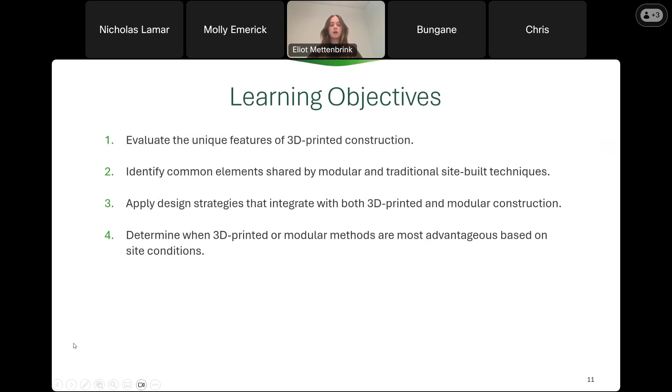Today, we'll discuss trends in novel construction techniques in the form of 3D printing and modular construction. Speakers will share real-world successes and challenges they have encountered while implementing these game-changing methods.

Our first speaker is Chris Krager with KRDB and Module. In 2001, Krager founded KRDB, a vertically integrated design, development, and build firm with a mission to create modern, financially accessible architecture that supports sustainable urban growth. Krager is also the founder of Module, launched in 2008 to expand the reach of sustainable modern design through factory-built housing. Beyond practice, Krager has served as a lecturer at the University of Texas at Austin School of Architecture and has presented at conferences and institutions nationwide, including Hive, AIA, and the Rural Studio. He also co-founded the DBA, Design and Build Alliance, a nonprofit that connects architecture students with real-world experience developing affordable housing for underserved communities. I will turn it over to Chris now.

Okay, thanks, Eliot. Appreciate it.

So today I'm going to give an overview of modular, or what I'm going to refer to as industrialized construction, and I'm going to give a quick synopsis of what I'm going to review today. We're going to start with a little 101 because I'm assuming some of the folks watching this may not have deep knowledge, so the first couple of slides might be a bit redundant for those of you who are familiar with the modular world. We'll review what it is and how it's defined, the different types of industrialized construction, some myths about it, benefits, and then a quick tour of the evolution of our firm through the modular space. It's a lot of material, so I'm going to move through it quickly. Please type any questions in the chat for the Q&A.

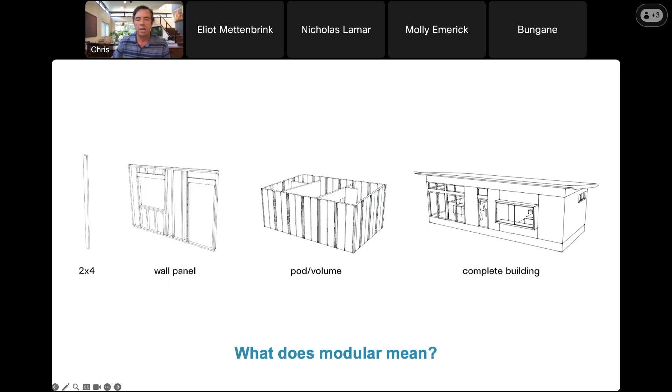So the word modular means something that's designed with a standardized unit or dimension for easy assembly, repair, and flexible arrangement. The term could apply to something like a 2x4, a wall panel, a pod, or a volume, but it's often used interchangeably for the thing we see here on the right, which is a full volumetric building. There's an umbrella term, industrialized housing, and under that umbrella there are three different types of industrialized housing.

So there's modular construction, which is what our firm designs and builds, and that's a factory-built dwelling built to IRC or IBC that's placed on a permanent foundation. And then there's manufactured housing, which is a factory-built product delivered on a steel chassis, transported in one or more sections, not put on a permanent foundation, and built to HUD code.

And then finally, there's park models, which are towable, recreational type vehicles like an Airstream trailer. And that has its own code, which is the ANSI A119.5.

So some of the myths about modular construction: one is that it's less expensive than site-built construction, and this is not true. Essentially, it's at parity these days with site-built construction. Another is that there's no design flexibility with modular construction because of the constraints of what you have in the factory and what you can deliver, and this just isn't true. A seasoned modular designer can achieve just as much as a typical site-built building.

That it's poor quality, also not true. These are built in a controlled environment under a stringent QA, QC procedure, and so in some ways probably built to a higher standard than conventional construction. That they're hard to finance — this is not true. In almost 20 years of building modular projects, from ADUs to multifamily projects, basically any lending institution of any level of sophistication can finance a modular project.

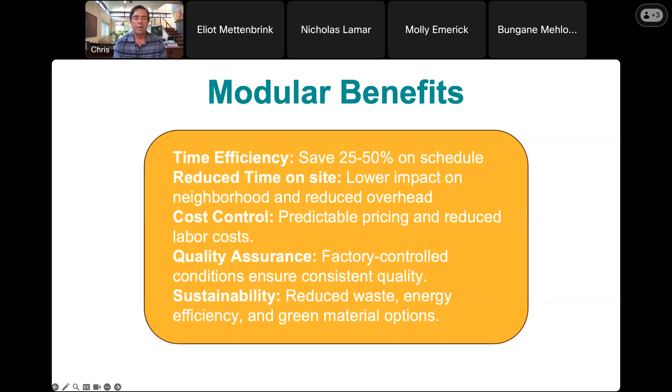So some of the benefits of modular construction: you can save 25 to 50% on your schedule. You have reduced time on site, so there's lower impact on the neighborhood and reduced overhead for the construction firm. Cost controls — you've got predictable pricing and reduced labor costs. Again, the quality assurance — you've got factory controlled conditions, which ensures consistent quality. And from a sustainability standpoint, you've got reduced waste, energy efficiency, and as many green material options as you'd have with conventional construction.

So then I'm going to jump into our trajectory as a firm in the modular space. Real quick, some backdrop on this. When we started KRDB 20 some years ago, we designed and built a couple of houses in Austin that ended up in a national publication. We started getting inquiries from people around the country. And after designing houses in Denver, Oahu, New Jersey, and several other markets, and having them come back bid at significantly higher price points than we knew we could build in Austin, we knew there was this latent demand for high quality design at an affordable price point. And that's when we pursued modular construction.

I call this phase one of our modular trajectory. I started calling around factories in the state of Texas and found one in Waco, Patriot Homes, that was willing to work with us and design our first project. Our approach on this — we realized that while there were constraints in terms of how the factory built and what you could deliver, we also did not want to forego design. So the initial approach with modular was taking a kit of parts. And then when we had a client that had a site, a program, a budget, we would assemble a building based on those parameters with the kit of parts that we had developed.

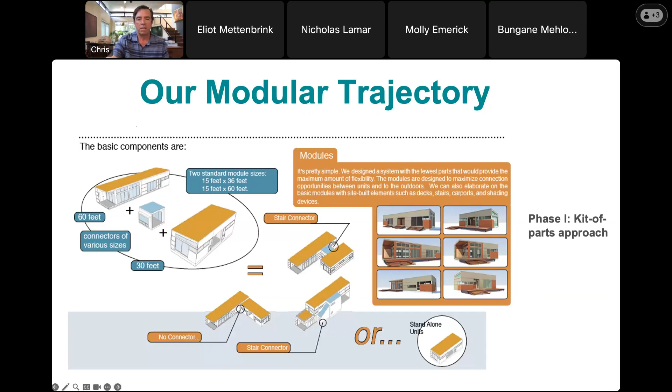The first project we built, I decided I would be my own guinea pig, and we would build a spec house here in Austin. I bought a piece of land and found this company in Waco to agree to design and work with us to build this house. About a month into that process, we got word from the company that they were going out of business — they were going bankrupt.

Fortunately, the architect that was working for them moved to a company in Indiana and said, 'We'd like to build this for you.' And even though we had to ship it 1,600 miles, the first house we did in Austin, which is a 1,500 square foot, 3-bedroom, two bath house you see here, we had fabricated in Elkhart, Indiana, and shipped to Austin with very surprisingly few defects.

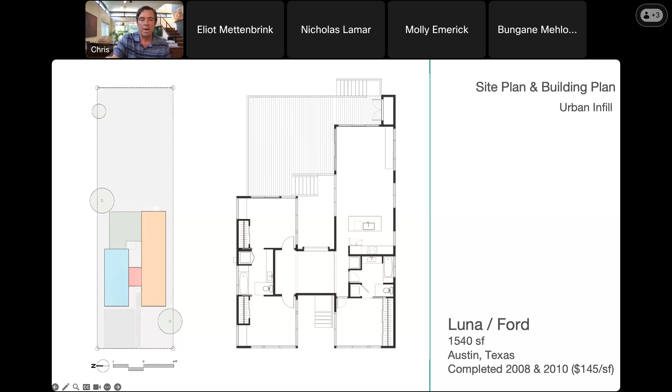So after about a half dozen of these projects, and having a few companies go out of business, we realized that one of the advantages of modular construction is you need to take advantage of redundancy in the factory environment. The factories we were working with said, 'If you want us to build for you, you need to not redesign the building every time you come back to us.' So this was phase 2 of this trajectory.

I call it the Henry Ford model, where we pared down the offerings to a dozen houses that we would provide. These could all be customized in terms of interior finish, exterior finish, et cetera, but we limited these offerings to these 12 houses.

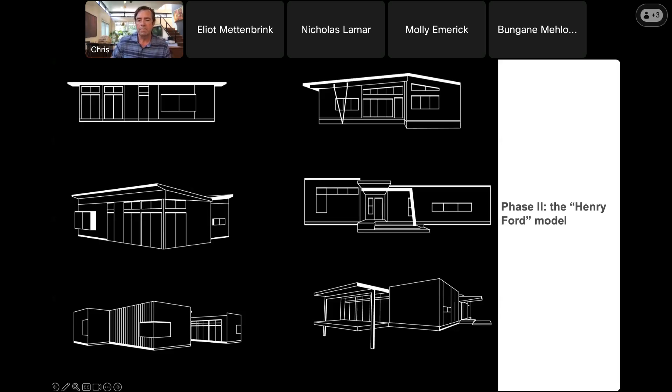They ranged—over those 5-6 years we had about 7,000 detailed inquiries. So we pared it down to what we saw as the most sought-after floor plans, which range from 550 square foot ADUs to a couple of 2,000 square foot houses.

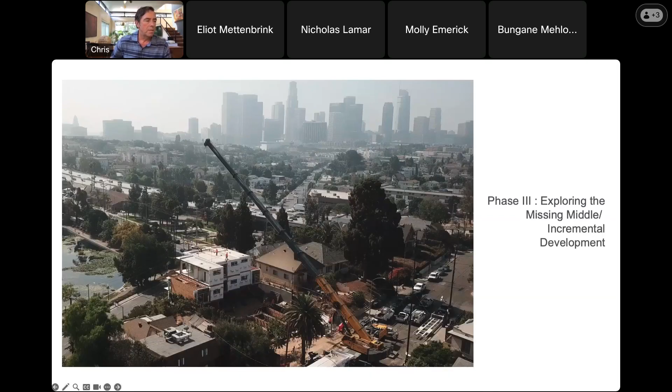At about the same time, we had some opportunities to explore modular in increased density. So this is when we started designing what we call missing middle or incremental development projects. These range from small, medium, to large size. The project depicted here is a 5-unit project we did in Los Angeles in Echo Park, overlooking the lake there.

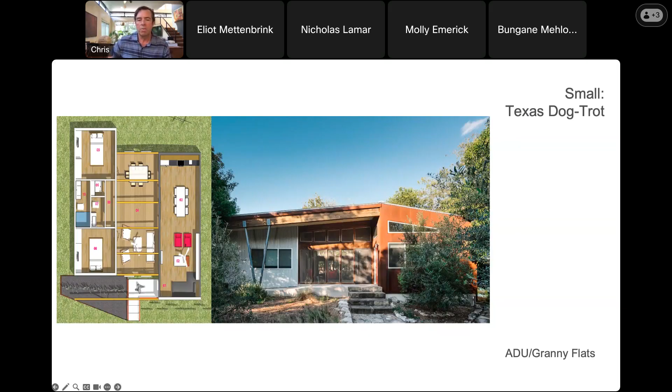On the small end, we really started focusing on the ADUs, or granny flats, in this pivot. These were becoming more broadly allowed and demanded. In California, for example, where we were working, a state law had been passed that required all municipalities to allow ADUs in their market. The house depicted here is actually a true granny flat we designed for a couple of professors from Baylor who would come down to visit their grandkids on the weekend.

The screen porch you can see here in the photograph between the two buildings.

And then back here in Austin, we developed, designed, and built the first modular mixed-use project in the city. This is located on a half-acre tract at MLK and Leona. It was formerly 4 single-family houses, and we built a 24,000 square foot mixed-use modular project there.

The project was organized around a courtyard and anchored on the corner with 3 small commercial spaces. Of the 24,000 square feet, 20,000 was modular and 4,000 was site-built.

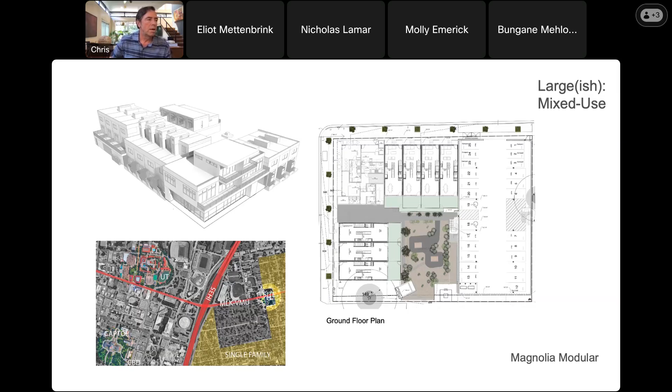There was a podium on the left-hand side of the project here depicted, where we parked the project, and then there was a second floor courtyard above that podium with additional units.

The project was composed of 3 unit types: a single-box 630 square foot 1-bedroom plan, a 2-box 1,330 square foot 2-bedroom plan, and a 3-box 1,830 square foot 3-bedroom plan. Note that the first and second floor plan of the 2-bedroom and 3-bedroom unit are the same.

The volumetric modular approach allowed us to complete these units to about 90% in the factory. A couple things we did in this project were unique, because this was one of our first multi-unit, multi-story party wall projects.

We introduced light chimneys in the project to bring additional light into the center of the building. Also, one of the most difficult things in multi-unit modular construction is the coordination of the mechanical, electrical, and plumbing, so we introduced interior chases where all of what we call the crossover connections were made.

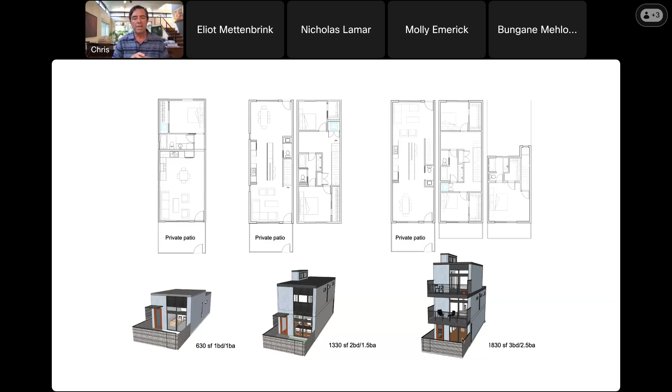We also utilized ductless mini-split systems and tankless hot water heaters. These both increased the operational efficiency of the project and the implementation of the project in the field.

Here's an exploded aerial view of the project: the site prep, utility coordination, and foundation construction, along with the podium, were done first. You can see the courtyard here in the middle.

Because we did not increase the impervious cover on this project, we were able to just do a bioswale for the detention requirements.

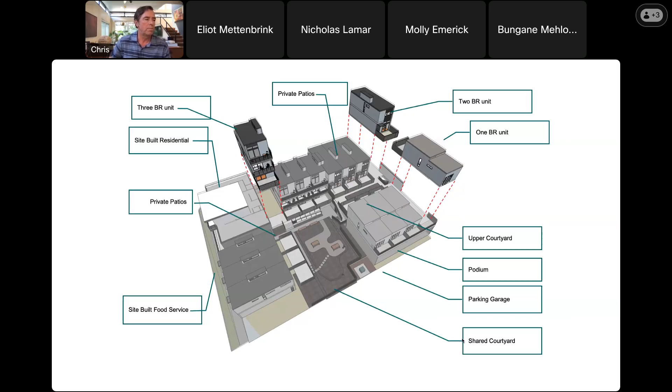On all of the units, 1-bedroom, 2-bedroom, 3-bedroom, all had at least one private outdoor space. The 2- and 3-bedroom units had integrated patios that were actually built in the factory with the construction.

We've also been exploring some alternative building typologies recently. This is a site plan for a 76-unit, 55-plus alternative community that we have fully entitled in Buda, Texas. It's a 6-acre former organic farm.

In the center we have the old farmhouse that we've converted into a common house along with some maker spaces just to the south. We've got a community garden here, a dog park. You can also see that we've pushed the parking to the perimeter of the project, and the project is comprised of duplexes and triplexes consisting of 4, 5, and 800 square foot units.

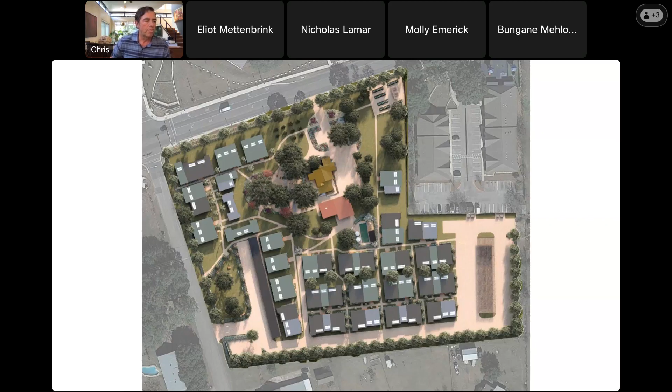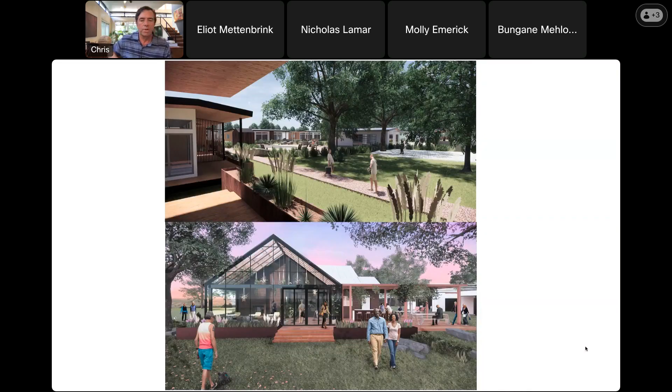And then here, the cabin units—again, we kind of marginalized the parking and privileged the pedestrian realm with porches on every unit and eyes on the street.

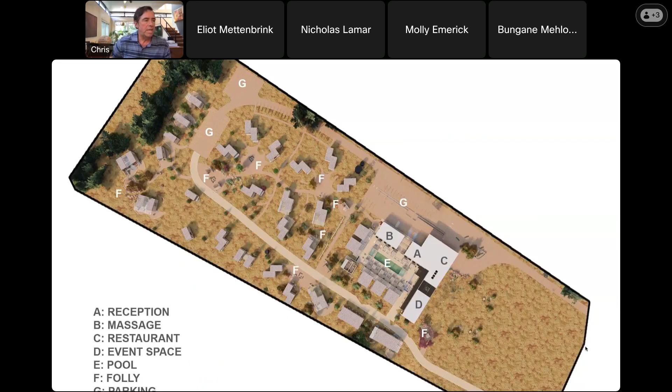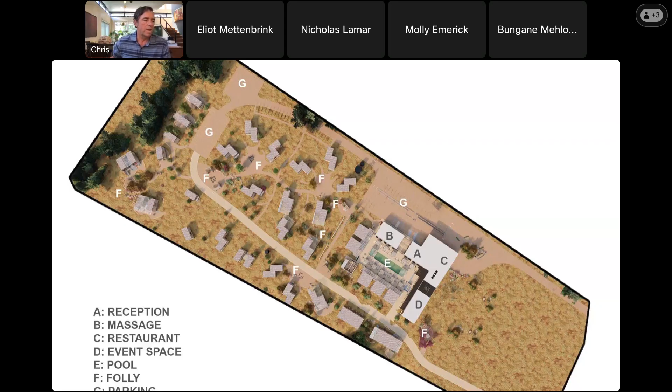We also recently designed a 58-unit hotel project in the Hill Country in Dripping Springs on an 11-acre site. This is actually a combination of modular typologies. What you see here is the restaurant, lobby, and event space around a pool area, all CLT, or cross-laminated timber, and glulam construction. The 58 units, cabin-style scattered throughout the site, are volumetric construction.

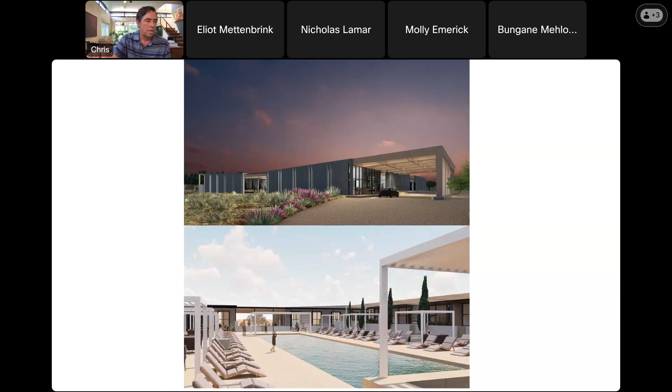Here's a rendering pulling up to the main building, the CLT, and the pool area below with the modular cabins around the pool area, and then a rendering of the hotel units.

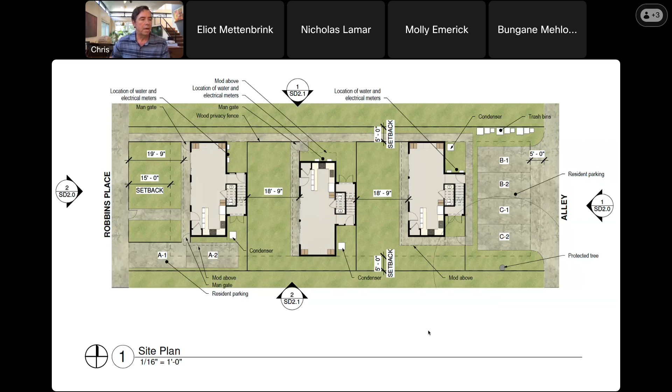Finally, under Austin's recently passed HOME ordinance, we're about to finish our first modular home project. This was a change to the Austin Land Development Code that now allows 1-family, 2-family, and 3-family units. This is a 50 by 150 foot lot where we were able to get three 1,600 square foot, 3-story, 3-bedroom, 3-bath units, but also with 18-foot yards between those units.

We're coming pretty close to wrapping it up. Lastly, I just wanted to quickly review some of the things you might want to think about if you are considering modular for a project.

First, what we call a fit test: is modular right for this project? That starts with site feasibility, meaning can we get the crane and the trucks there? Are there any impediments—power lines, trees, etc.? And also the project typology—do the spaces work with modular construction?

Also crucial is integrated design—I can't emphasize this enough—and engaging the factory early. This means having your team on board early: your architect, your structural engineer, your MEP, your civil, and hopefully your general contractor as well. This is key to the success of a modular project.

Design for manufacture and assembly means understanding how the manufacturer works, what their systems are, and what you need to conform to. Know your code pathway—for modular, projects can be IRC or IBC. Most factories do either IRC, basically residential up to maybe 4-unit townhouses, but some factories do both IRC and IBC projects.

What your permitting strategy is—can you have your site permit working in parallel with your factory approvals? The one thing that's different about modular is that you're getting the factory portion approved by the state agency. In Texas, that's the TDLR. Also, what's your logistics plan, making sure you coordinate with your crane, your set crew, and your factory.

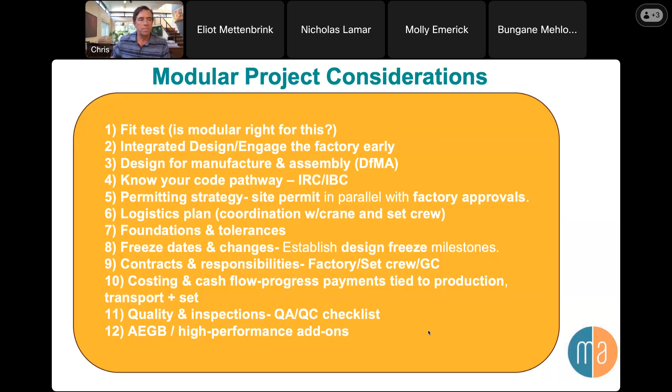And lastly, since this is an Austin Energy Green Building forum—with a modular project, if you want to attain 5-star or LEED Platinum, basically any level of sustainability you can achieve with a site-built project, you can, for the most part, achieve with modular construction. So I'm going to stop there.

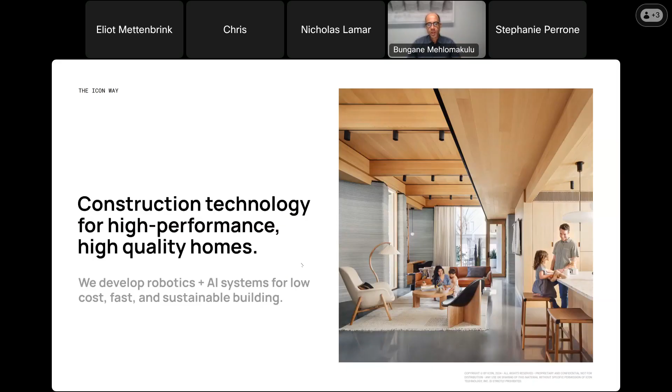The idea behind 3D printing construction is to be able to deliver higher performance. So when we're talking about housing, being able to provide a higher quality home product with faster construction and at a more affordable and cost competitive rate.

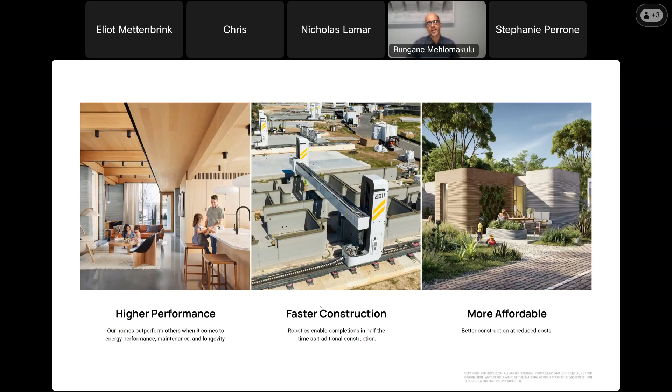Today, our technology is comparable or competitive with most framing methods, except for those of the largest volume builders who have a lot of advantages when it comes to the suppliers and trades they're able to lock in. But we're cost competitive right now from an overall delivery perspective for the walls. There are a lot of factors that go into the cost related to the location of the site and the amount of printing that's actually being undertaken.

And the idea is that we want this to be beautiful construction. We want it to be sustainable and more resilient. I'll talk a little bit about some of the ways that we think 3D printing construction is able to achieve those aims.

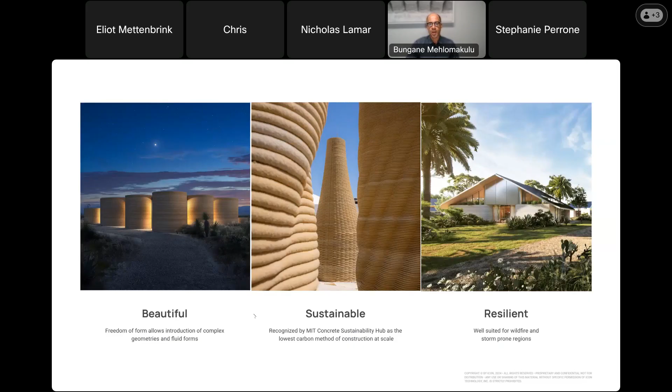From a company perspective, one thing that's different about how we approach things, and important to consider if you're thinking about 3D printing construction technology for a project, is who is providing the robotics, where's the material source from, and understanding the design and software side. ICON is fully vertically integrated - we design our own robots, we've developed and supply all our own material for the Central Texas region, we have in-house architects and structural engineers familiar with 3D printed construction, and all the software for taking a design from design to print, as well as running the printers, is developed by ICON.

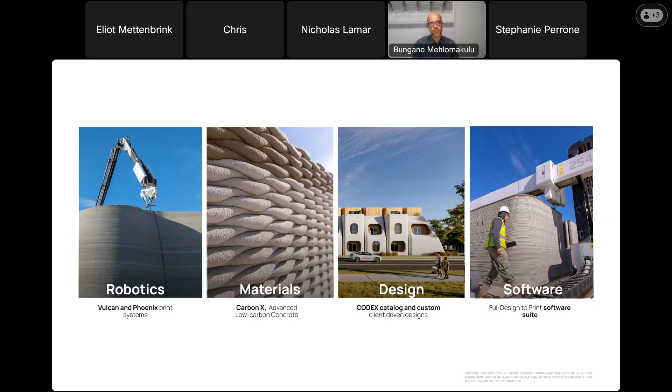A lot of folks doing 3D printing construction - if you're going to work in that area, make sure there's an understanding of how all those different parts fit together. One thing we've learned over time, and you see it cropping up in the industry, is that putting one type of material through one manufacturer's printer and then putting that same material through a different manufacturer's printer actually yields a different result. Being able to understand those interoperabilities is a really important part of 3D printing construction.

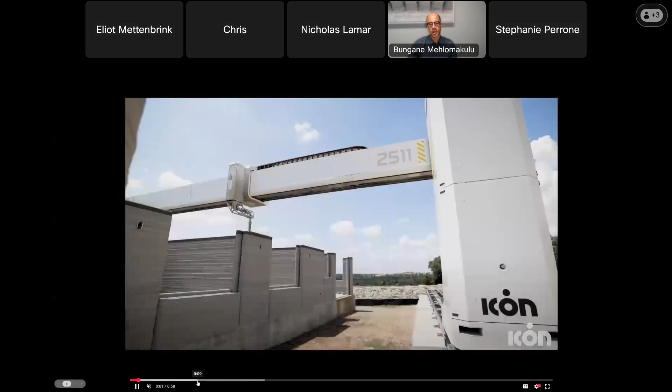So jumping right into it here with a little video to get some visuals. It might be choppy a little bit to start, but in our trials it generally went well. To give you an idea of what 3D printing construction is.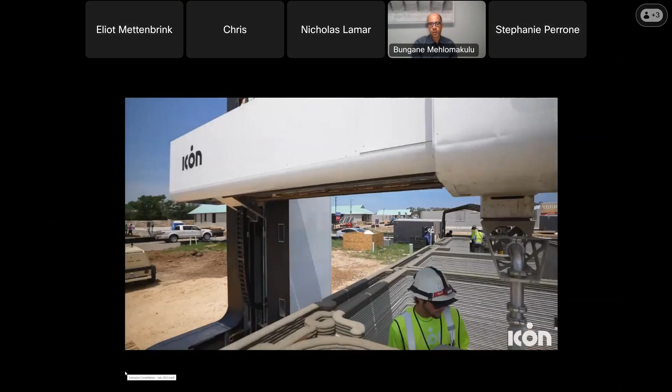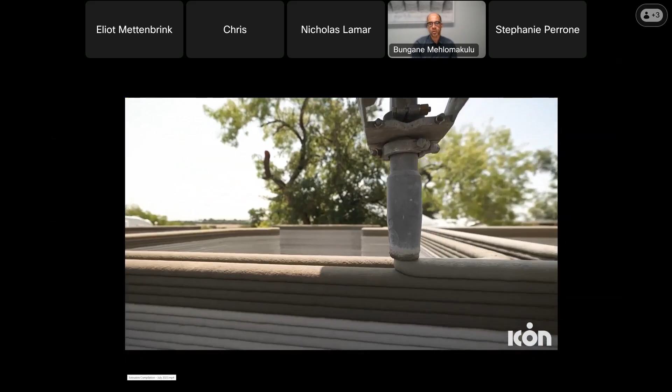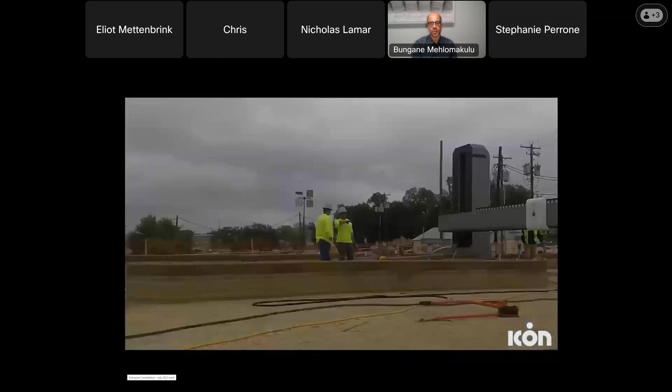What you're looking at is our current generation printer, our Vulcan printer setup - it's a gantry style. You can see what the printing process looks like. This is from a variety of projects, mostly in the Austin area, though some were shot in other locations. You can see we're extruding the material, being put down layer by layer. It's almost like a large format desktop printer, just printing with a different construction material.

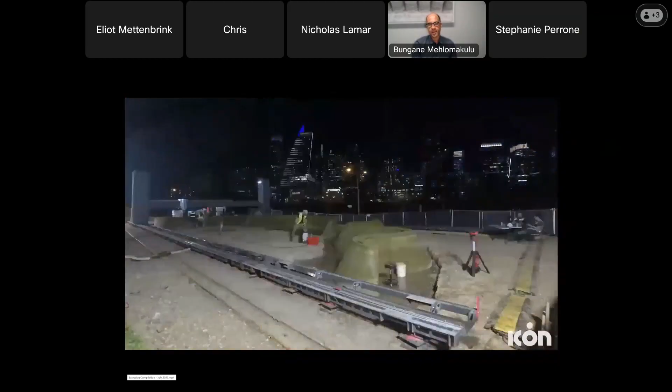This is some testing we've done on site here. This is the Cosmic Pavilion that's going up, which you can actually see outside the Long Center today. So what I'll do is go through and talk a bit more about what the technology actually is, what this Vulcan printer is, and how it works - but it's often helpful for people to actually see the process of 3D printing to understand it.

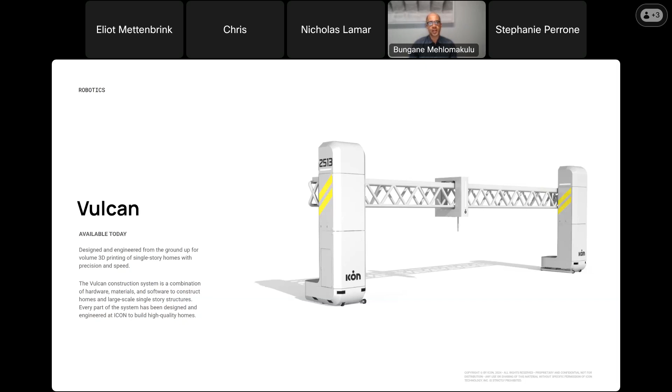Vulcan is the printer we're working with today. It's a gantry style printer, and if you look across the 3D construction space, it's really the most common printer you saw. The reason is it's a very stable engineering platform to set up. It has two vertical towers we call the Z towers, an X-beam, and a shuttle that moves back and forth - so it's a very stable platform. It's easy to understand the coordinate system, and fundamentally an easier engineering platform to stand up.

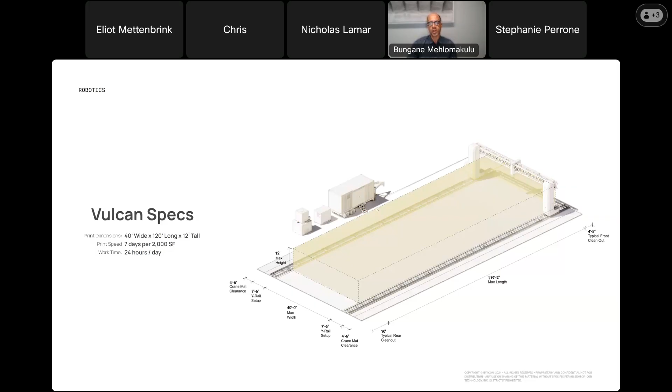From a space perspective, our gantry style printer is capable in a single setup of printing a maximum of 40 feet and about 120 to 150 feet in length. What we've actually done is taken this printer setup configuration and overlaid it to create both larger commercial buildings and residential homes. The form factor for this size was driven by two needs: the 40-foot width roughly fits the minimum lot size for production home development, and the form and size was able to fit inside a shipping container, so we could deliver it to site with two vehicles - one bringing the Magma, the other bringing the Vulcan printer.

The method that we use is in situ, building on-site construction. What it really means is every site is like a little mini factory.

A couple other things to call attention to: one thing you don't see a lot of is people. Today we are operating a single Vulcan printer setup with 2 operators. On larger sites, we'll have a third person serving multiple printers, providing field support. With those 2 operators, they're basically able to complete all the printing activities that are necessary.

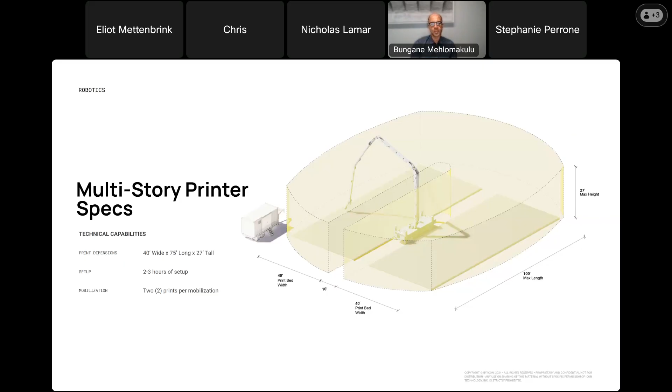So this is the prototype of the next generation printer that printed what we refer to as the House of Phoenix, which is down in South Austin across from our headquarters off of St. Elmo.

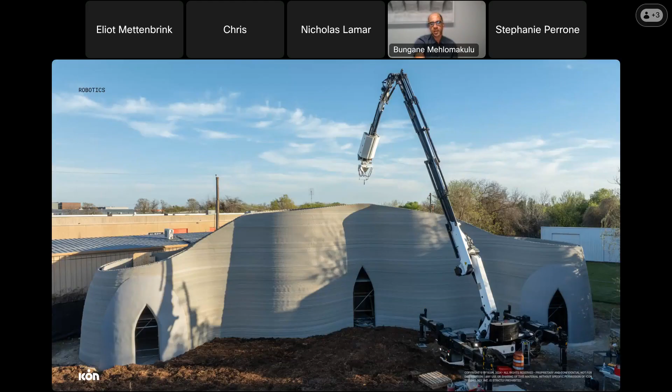So what are we printing? We are printing a wall system. When the company was founded on the idea of creating more resilient housing, we wanted to create and select a technology that could scale and had widely available materials. So the wall system we're working with is basically a concrete wall system. What we're printing with is actually a cementitious mortar, and the main difference between a mortar and concrete really comes down to the aggregate size. Concrete has larger aggregate - that's the biggest difference.

We're going along and depositing layer by layer. We're creating two shells - an inner shell and an outer shell. Then on alternating sides of each one of those shells, we are printing what we refer to as cores, or also sometimes referred to as pilasters. And then inside those pilasters, we're putting a piece of reinforcement, and we're grout filling that cell.

The spacing of these cores varies on the structural requirements, wind loading, height of the wall, and that sort of thing. But in general, they're spaced roughly every 4 feet, and then on either side of window and door openings around the shell. Across the top of the wall, there are multiple options. We have done and can do a bond beam, which is similar to CMU construction. We can also do wooden top plates. We've done rim beams, and all of this sits on a conventional foundation.

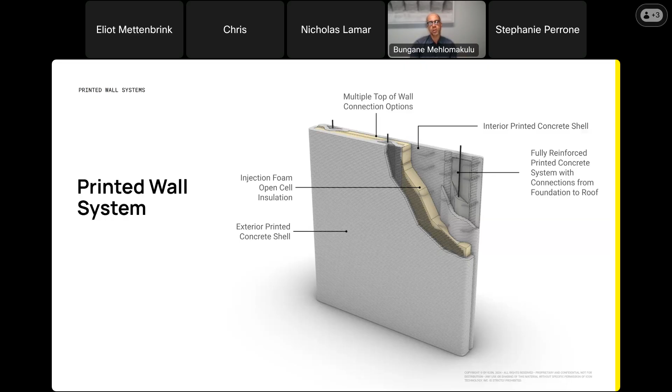From a moisture and weather barrier perspective, this system relies on a barrier wall approach, and the exterior concrete shell is where the weatherization barrier occurs. We have done moisture control vapor barrier testing; it's technically a class 3 vapor retarder with a perm just over 1. On the exterior side of the wall, we did field testing of the bare material itself, and it did a pretty good job of preventing rainwater penetration. We also apply a clear coat sealer to any architectural exposed finishes where there's no paint on the wall, and we use a painted block filler system on the exterior of the wall.

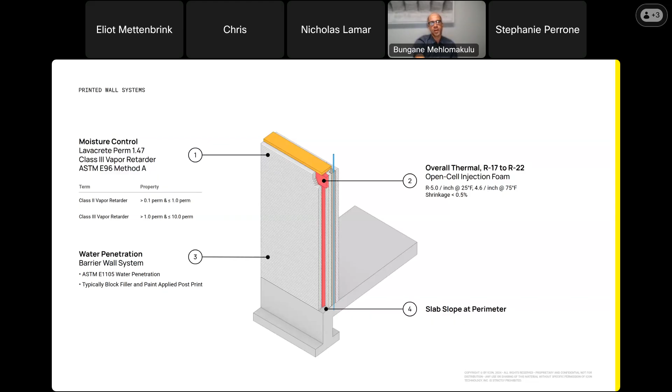At the perimeter, we have a slab slope. Inside the wall, the overall thermal performance ranges from R17 to about R22. For those familiar with U factors or R values for masonry walls in our climate zone, the code value is R6 of continuous insulation. So from a masonry or mass wall construction perspective, this is several times better than code. This is an engineered and tested system.

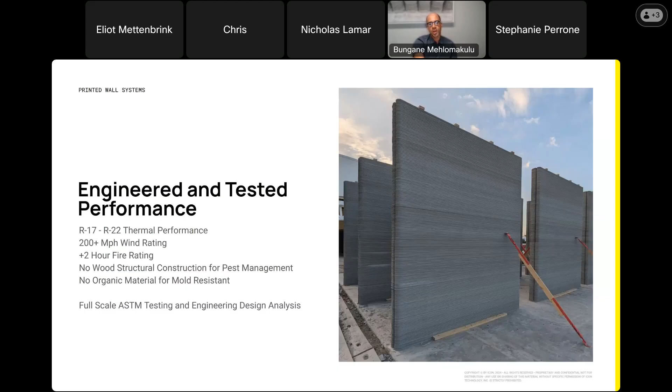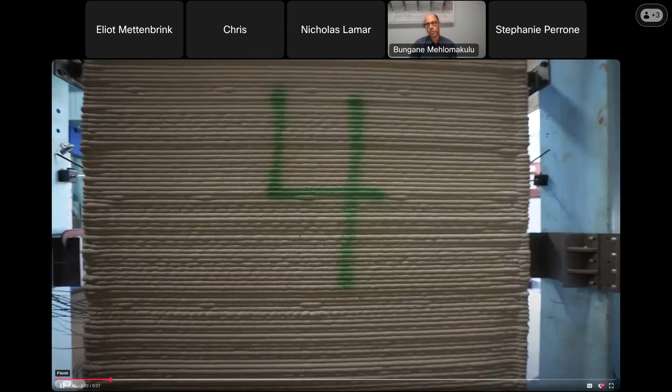From a code compliance perspective, these walls have been tested for high velocity wind zones, and that wall system has achieved an over 2-hour fire rating. There's no wood involved in the structural system, and no organic material that promotes mold growth. We've done a fair bit of full-scale testing - this shows testing we did coming up on 4 years ago, and we've done several other iterations with our newer wall systems, testing these walls all the way to failure.

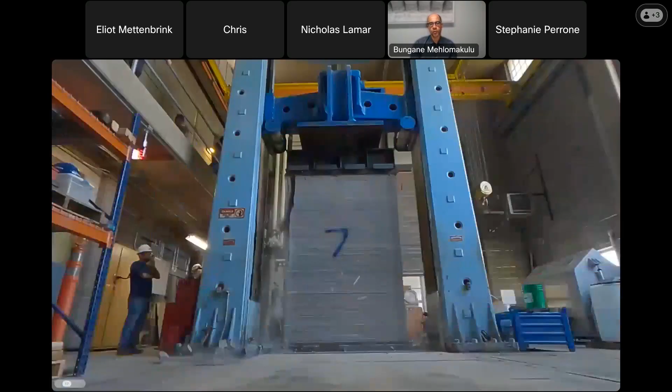Full-scale samples, this is axial loading. Before that, you saw flexural loading, shear loading, to understand the engineering properties of the wall systems themselves.

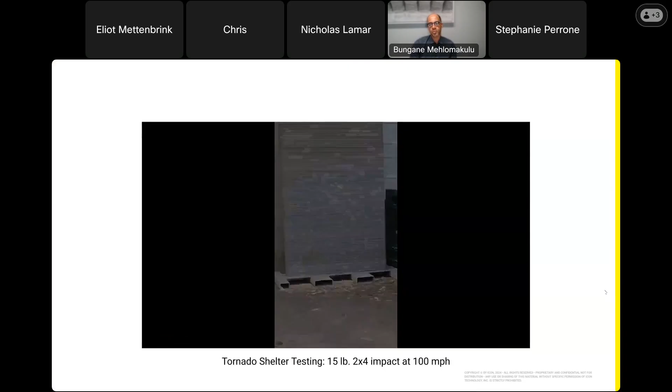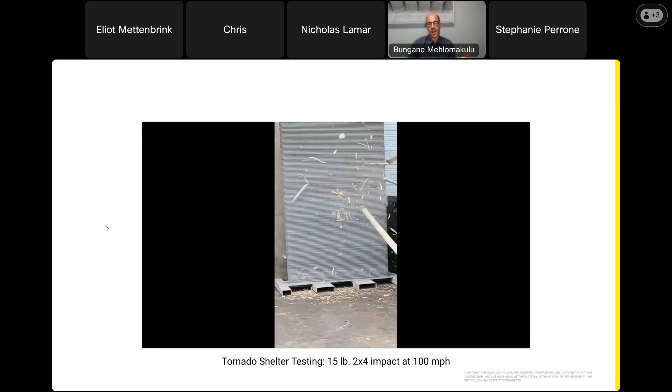This is a version of our wall system going against 2 double shells and doing a tornado test, where you're throwing a 2x4 at the wall at 100 miles an hour. For high velocity wind zones or hurricane winds, you toss a 2x4 that's a little bit lighter at about 30 miles an hour. This is showing what happens at 100 miles an hour, and shows the opportunities for using it for tornado shelters.

From an approval and permitting perspective, there are a number of organizations working on both standards for 3D printing construction and code language. Both ACI and ICC have draft language out for public comment - I can't remember if the comment period has closed - to introduce into at least the IRC code language for 3D printed construction. ACI is going to take more time to work through language for commercial applications, but there are no current building codes associated with it yet. This is actively underway, and in the 2027 cycle we expect to see a section introducing 3D printed construction.

For those familiar with appendices in IRC 2021, Appendix AW - there was a clarification issued that it is not intended for use for cementitious 3D printed construction. Another company working with thermoplastics developed testing protocols tied to UL 3401, which became Appendix AW in IRC 2021.

All the structures ICON has completed have been permitted and designed by a licensed structural engineer. The most common compliant path we've taken is through the engineer of record's stamped construction documents and AHJ approval. We've also gone through the path of working with ICC Evaluation Services, developing and going through their AC 509 acceptance criteria, and getting an evaluation service report. So there are paths for achieving code compliance.

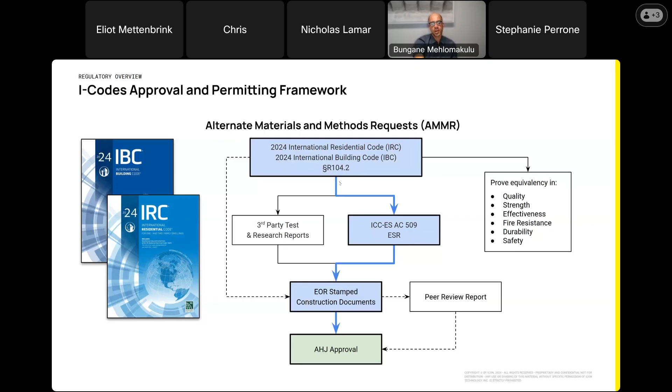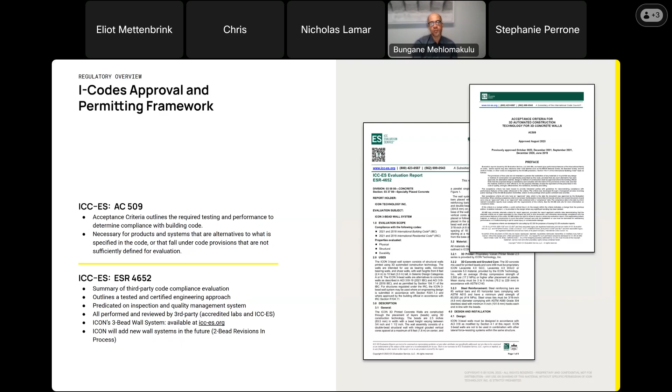So touching briefly on wall system and enclosure design, because I think that will be of interest in the closing minutes before we flip through some projects that are around Austin.

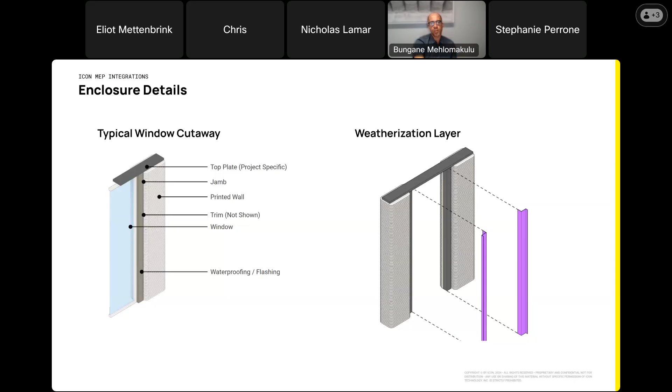From a weatherization perspective, we're installing a jamb that can be framed or metal, then flashing using liquid applied flashing from that framed jamb member onto the printed wall to deal with the scalloping or uneven nature of the print coming up to a framed member. That's how we're able to continue our weatherization barrier onto a window or door condition.

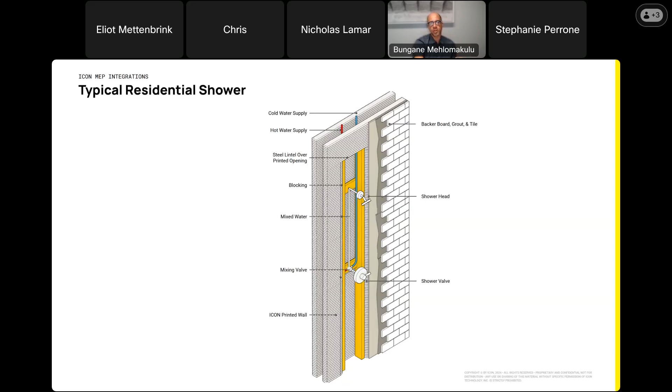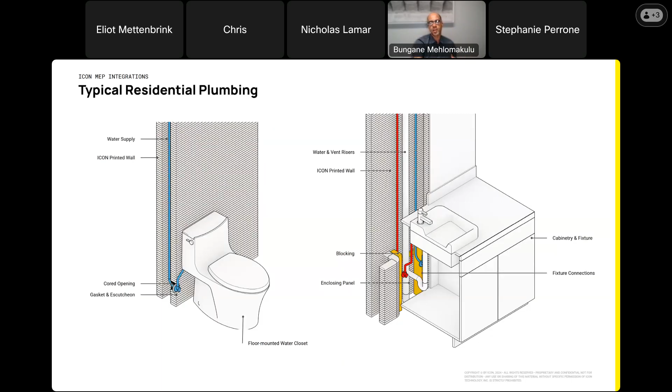For plumbing, we've made sure that any plumbing connections are exposed and accessible behind otherwise conventional materials. This shows how rough blocking is put in for a shower, and then you put your standard shower surround, whether it's an insert shower, tile, or plaster, to cover that up, so it remains fully accessible and understood by the trades. A similar approach is taken for toilets and behind vanities, making sure you can see the print turn in where there's framing and blocking.

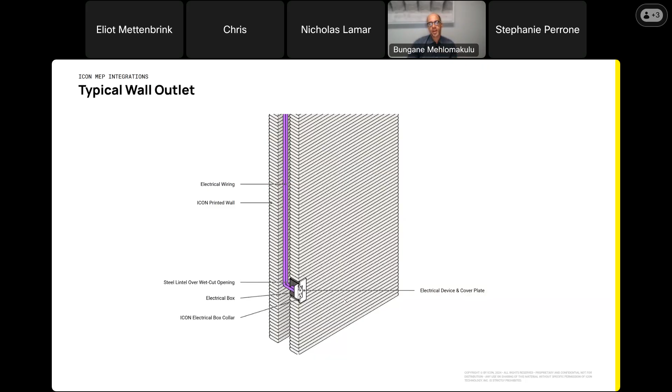For electrical, we create an opening that gets cut during construction, during the print process, and afterwards the electrical contractor comes back and puts in what is effectively like a masonry box installed inside the wall. For low voltage, these are just core drilled openings using Smurf tube if it's an insulated wall, or fishing wire for any surface mounted devices.

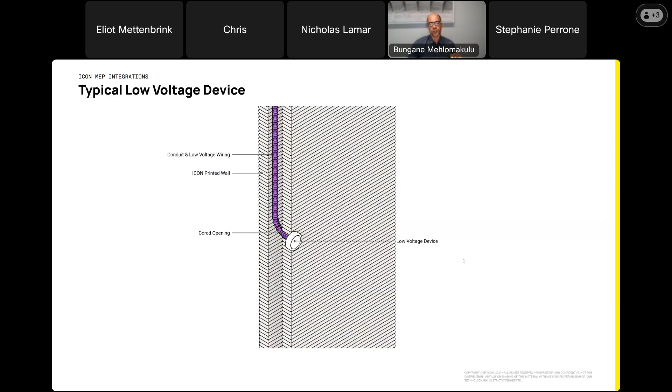So I want to run through some projects with a heavy focus on Austin. ICON would not be where it is without the support of the City of Austin and the building officials there taking the time to understand how our system works.

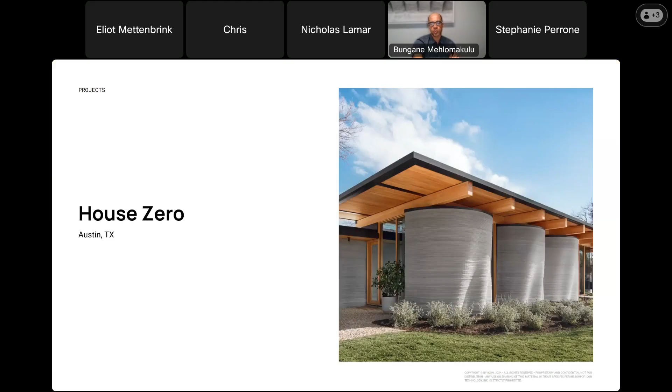Then House Zero, a home down in East Austin. There was really a tipping point in seeing the way 3D printing construction can be developed. This was a custom, higher-end home, intentionally designed and purpose-built around 3D printing construction by Lake Flato architects.

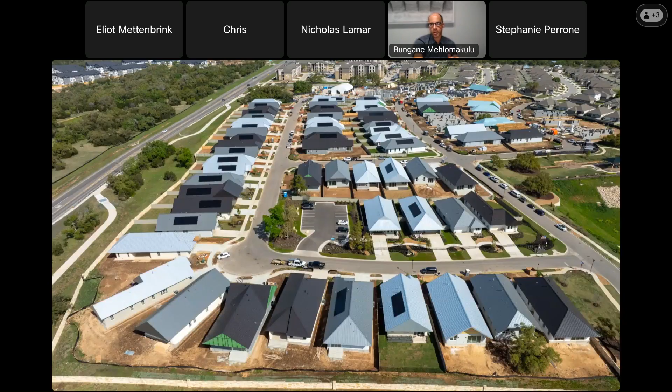And then, of course, Wolf Ranch, which I already showed you a shot of. These homes are for sale and it's been quite a successful community for Lennar. They've announced we're going to be doing another 200 homes with them next year, also north of Austin.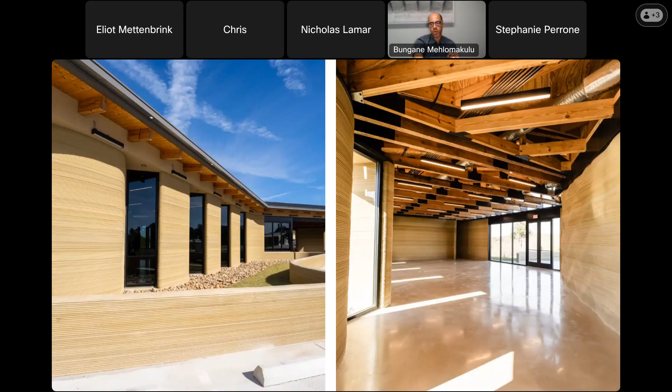This is a commercial project out at Camp Mabry, an example of an architectural exposed printed finish where just clear waterproofing coating was applied on the exterior. I think this is the last project I have before we wrap up for questions and comments.

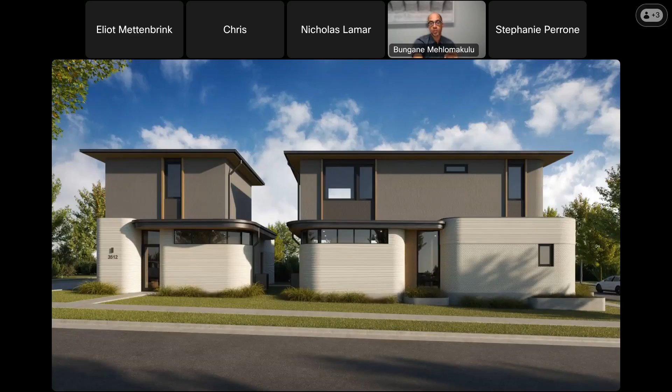These residences are actually under construction and being printed right now in Mueller, off of Tom Green in the southeast corner of the development, just off the Greenway. This is a series of market rate units as well as affordable units, consistent with how the Mueller development was conceived. So this is actually an opportunity that if you're in the area, you can go see some active 3D printing. I believe that's the last one.